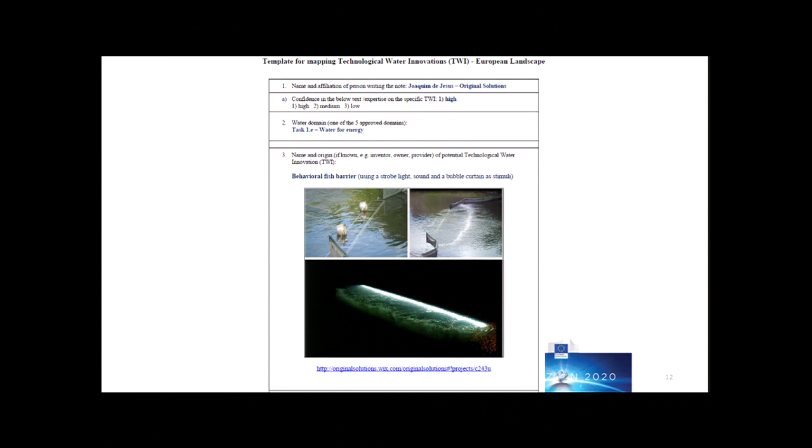So this was the first part of the template, 1, 2, 3, but we have up to 10. We would like to know how this technology is being developed, why it's being developed, to have the reasoning behind it. And of course, we have to know if this technology water innovation is a need or meets the Chinese water challenges.

So the idea is to use technologies from Europe to be incorporated in water resources management, flood control, and also water for energy. That was one of these technologies that I myself developed, Hydromatrix with Andritz Hydro, and it received a prize from the government, the president of Austria. These are very interesting opportunities for application further in China.

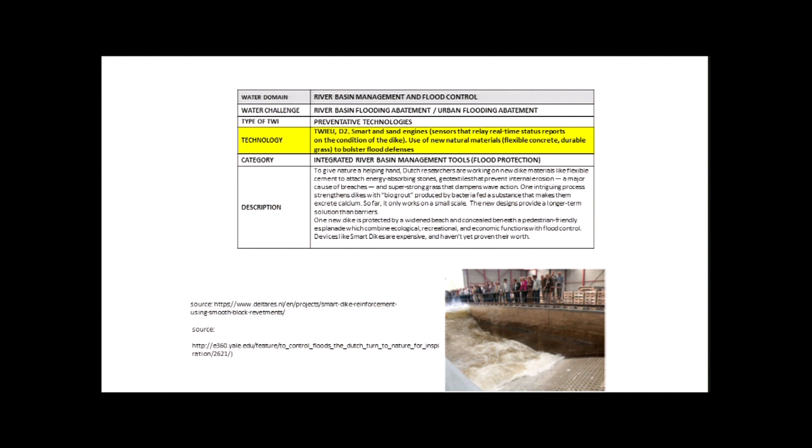So it's about 10, because we have developed like 23, you saw, so we have more, and then we come back to, besides this catalog, the prioritized 10 best in our opinion.

Then we have the smart sand engine for coastal zone erosion from the Netherlands. You have this type of monitoring device that was developed here in Portugal - a Smart Buoy performing in situ water quality monitoring, with a web platform receiving the information provided by the buoy.

So trying to see online if there was an accident there, and if you have a water supply from there, you are able to take action. But also different types of aspects, very interesting indeed.

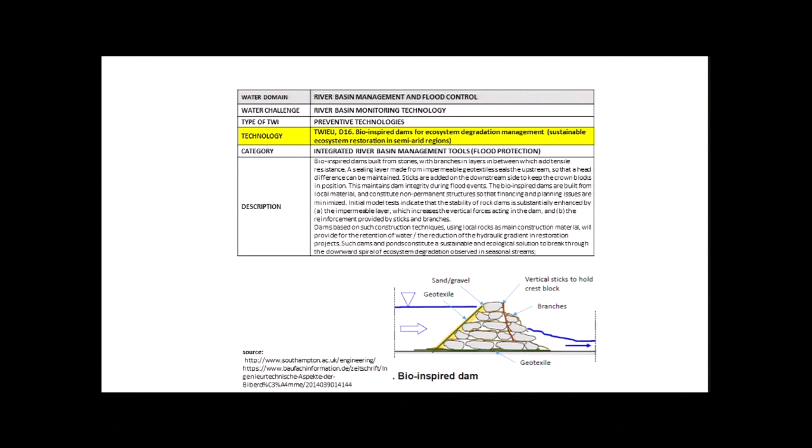We have the categories: integrated river basin management tools, flood protection, like this bio-inspired dams for ecosystem degradation management - how to maintain the ecosystem in a sound, sustainable way, also for semi-arid regions, and improved river basin management including flood control.

And we have also the natural water retention measures and decision support system tools, based also on managed aquifer recharge that will create a storage-like capacity, like a water bank. You have the excess of water, you plug it in there in the ground, in the aquifers, and in the next years, if it's a drought, you go there to pick it up if it's still there.

So the modeling is also a crucial aspect. Okay, I'm finalizing this now.

From the next thematic, water for energy, at LNEC, with EDP LabLEC, we have considered 6 different sub-thematic areas. Remember it was 10 in water resources management flood control. Here you have different types, and we went to review what was done before.

For instance, www.small-hydro.com - they have programs, innovative technologies. So we assess what others have done too: energy production technologies, water management technology, mitigation measures, safety and efficiency of existing dams and reservoirs.

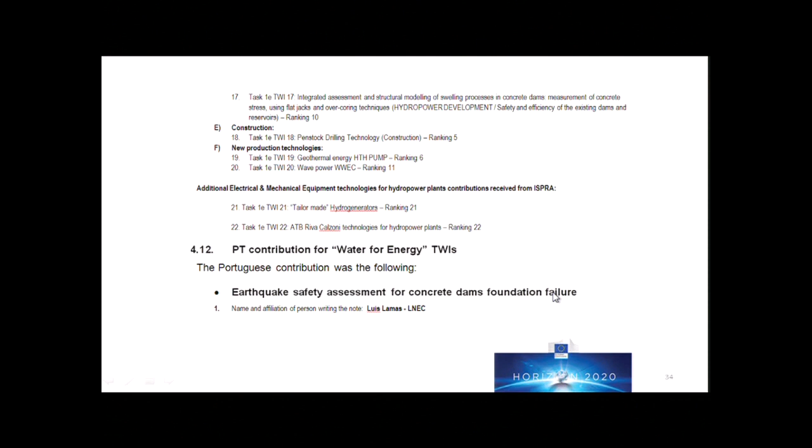Besides, we are developing modeling, and LNEC has also developed templates for earthquake safety assessment for concrete dams, foundation failure, integrated assessment of structures modeling the swelling process in concrete dams, and automatic behavior vibration monitoring systems.

This includes the behavioral fish barrier, Aqualitas, from Original Solutions, and also from the Portuguese Water Authority, the Water Agency APAmbiente, the Portuguese Flood Surveys and Warning System, SNIR, written by Rui Rodrigues here at LNEC.

The same type of catalog with those partners involved, as I presented before, is available there. You can click the internet link to see a little more about this, such as energy production technology and geothermal energy pumps to harvest geothermal energy.

Those are non-pollutant solutions, like micro hydro generators. This doesn't even require a dam, just a small ditch, and then you produce electricity without causing the problems that environmental assessment studies are sometimes worried about.

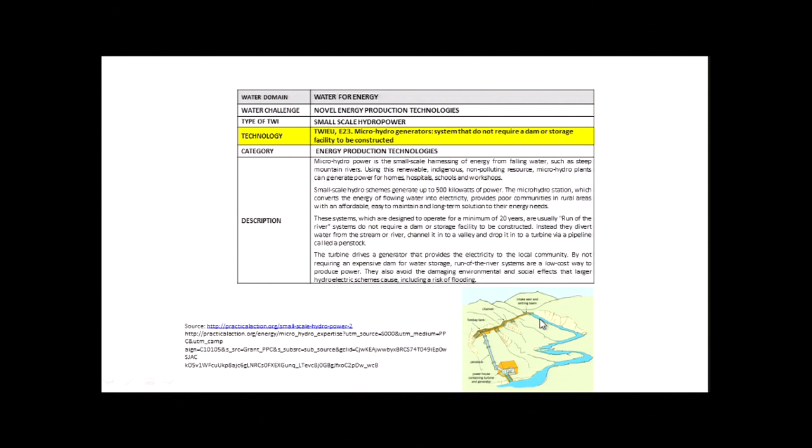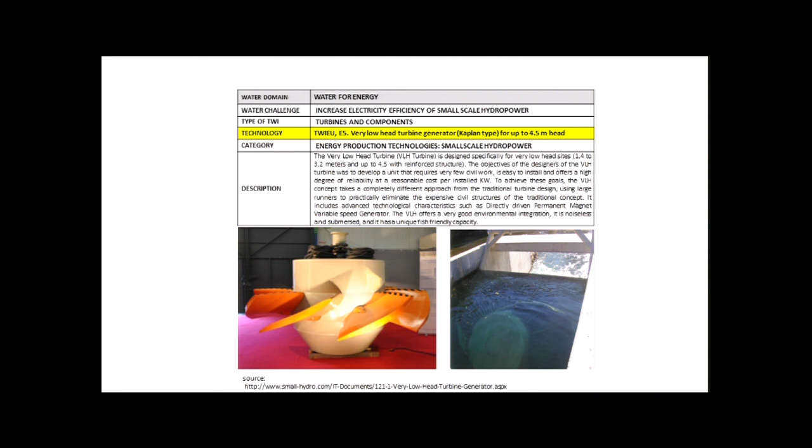We also have clickable internet resources, the strobe light I was telling you about, and very low head turbine generators for less than 4.5 meters, which is the future. This very low head capacity works in canals, dikes, small dams, reservoirs, etc. It's now available, and we've put a lot of effort into generating this type of Kaplan, Pelton turbines.

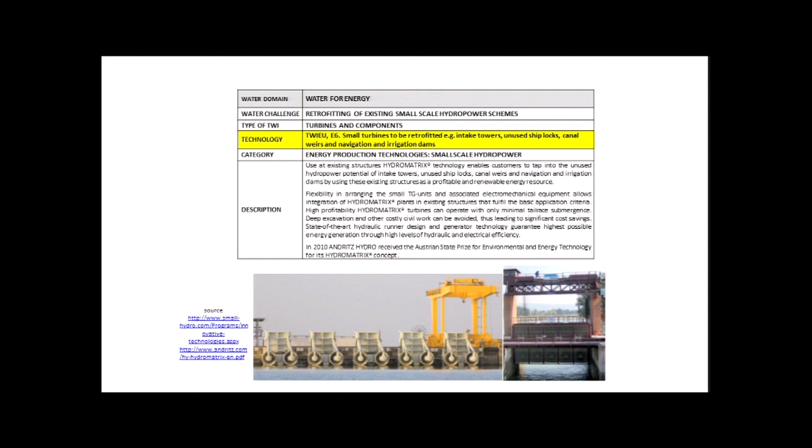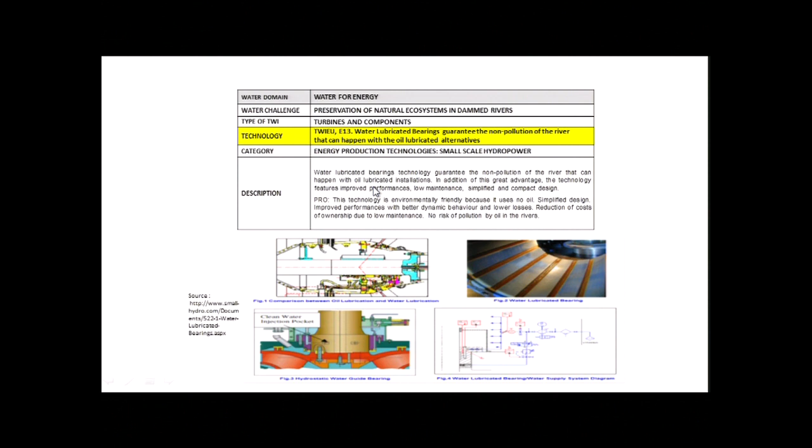This was one aspect, but also water lubricated bearings that are adapted to guarantee the non-pollution of the river. So water lubricated bearing technology guarantees the river stays non-polluted.

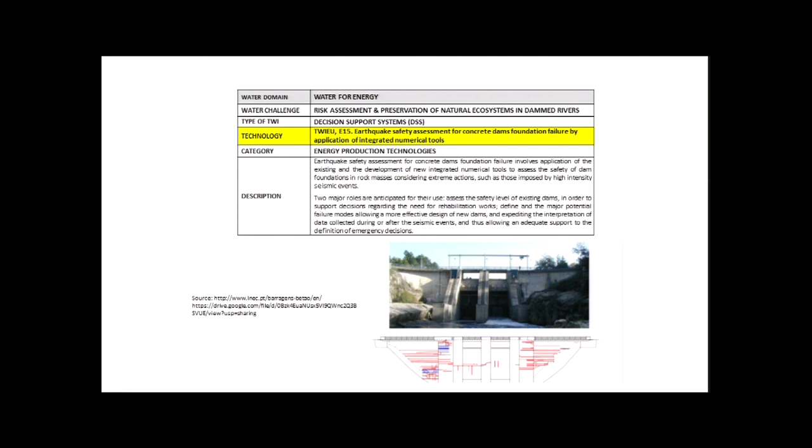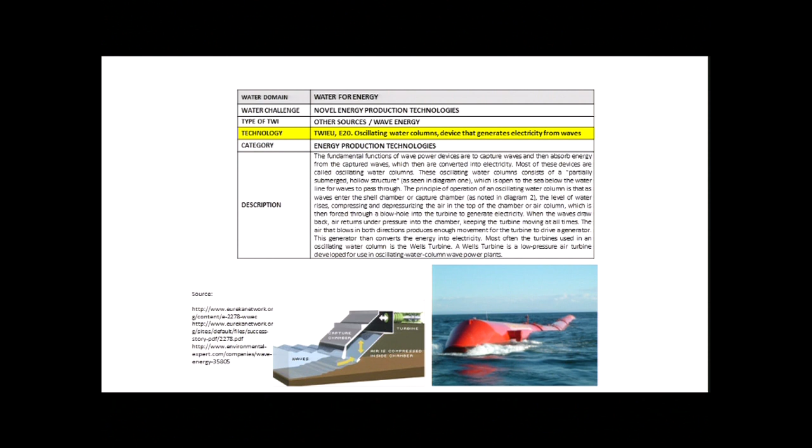We were also concerned about ecological behavior and what dams are causing, and what the solutions are. This includes earthquake analysis, the aging of structures, waves from the sea, power and refurbishment, simulators, decision support systems, etc.

This concludes this first part.

I wanted to mention that we also participated here at LNEC with Teresa Leitão, presenting by COTR in Alentejo, Portugal, at a side event for the action group from the European Innovation Partnership on Water to Market, which I lead, at the conference in Oporto last year, the European Innovation Partnership on Water large conference.

We had a side event relating to managed aquifer recharge, agriculture, etc. We contributed to agriculture water management, bringing the agriculture techniques and engineering that provided this type of solution, integrating PIANO and the European Innovation Partnership on Water.

This was coordinated by ISPRA, the water manager mentioned before, but ISPRA also coordinated, and now I'm changing the topic to the Policy Uptake and Strategic Research and Innovation Agenda from PIANO, the SRIA.

We presented this, as I told you, a couple of weeks ago at the Portuguese Water Congress in Évora, Alentejo. So what is this Strategic Research and Innovation Agenda, and why have we linked it together with Technology and Water Innovation?

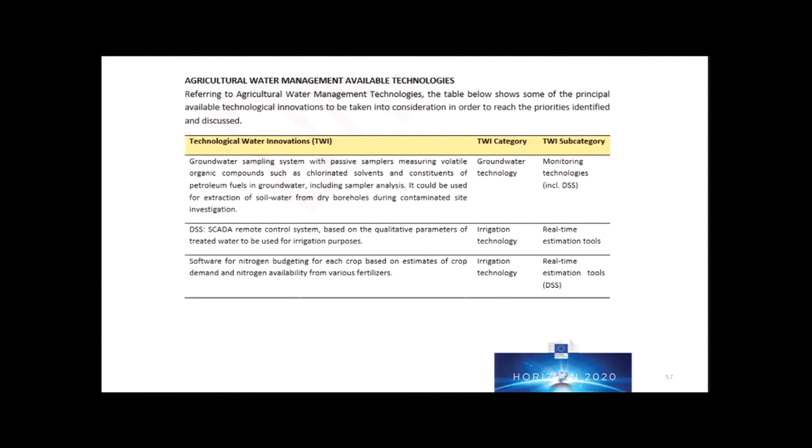But the decision support systems, the software for nitrogen budgeting, for the crop base, etc., we have this type of know-how, so please do use it. This is innovation. You can pass this research that's already done to the field. Use this, please. So this is from the river basin and management control.

This is where we should also learn from China, humble enough to go there and learn, and apply it here also. This is what we are doing in Lisbon: creating small dams inside the city to incorporate this water into groundwater instead of losing it. We're doing this already, but not yet enough as a must. We're too focused on pollution and not enough on scarcity in the Mediterranean area, so this is a fantastic way to connect and learn also from China.